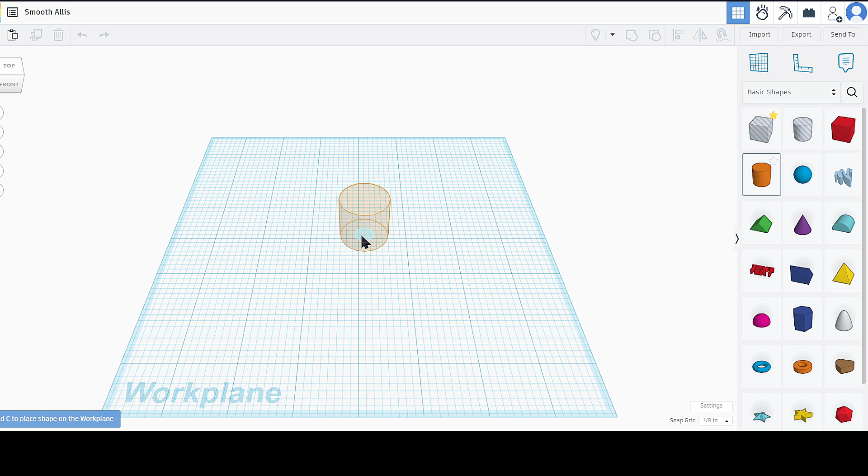So I'm thinking we're going to start with a cylinder here. Now I did a measurement of the stick and it's a 1-inch dowel in diameter, and this is exactly 1 inch by 1 inch by 1 inch tall. So first we're going to make this 3 inches tall, and then I want to bring this out. I'm going to press and hold shift, and we're going to make it 1.5 inches. Is that 1.5 inches? Yes, 1.5 inches. Put that back in the center. Click up here to check the top view. It's not going to let me center it, so we'll come down here and change this to 1/16 of an inch. Centered. Beauty, plan.

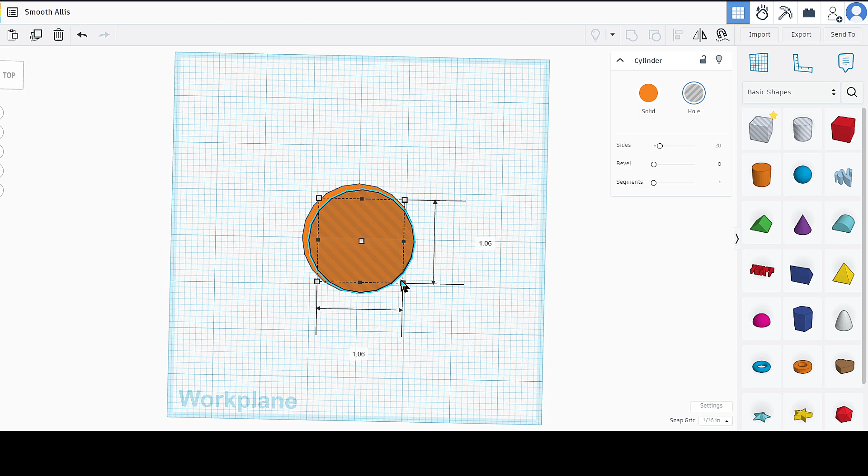Now, seeing how this is a 1-inch dowel, we're going to go just a little bit wider than that. We're going to grab one of these transparent boxes, stab that right on top. I want to bring this out just a little bit, go 1/64 of an inch. You know what, we might be fine there. So we're 1 inch, this is a 3-inch tube. We're going to bring this up to 1.45. Then I want to grab up here and slam it down into the tube.

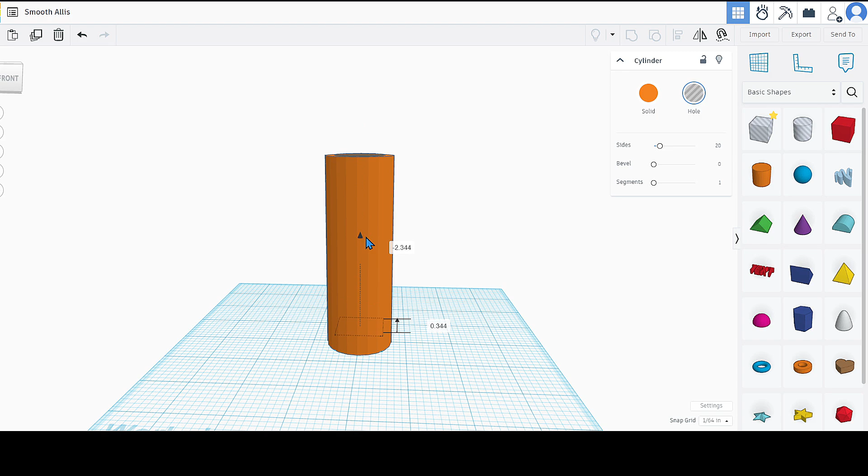Before I do that, we're going to copy it and paste it back to the top, drag this so it overlaps, slam it down so it's just protruding out the bottom a little bit. Grab all that, combine it, and what we end up with is a 1-inch hole with a plate in the back.

The dowel hopefully slides in there no problem. Maybe I should make it a little wider. Go 1.1, that looks good enough for me. That one's off kiltered anyway. Then we'll grab it all, re-put the hole in it, and we should be golden.

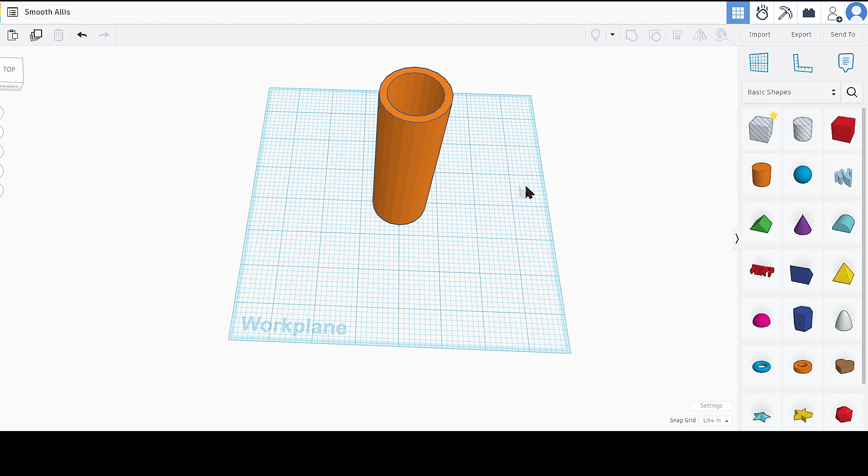Now, like I said, we can use glue, or we can grab one of these, shrink it down, extend it up, rotate it sideways. I'm not the best in CAD, as you can tell, but it's still fun designing your own projects, right? Copy that, bring it up a tad, and we'll shove it right through.

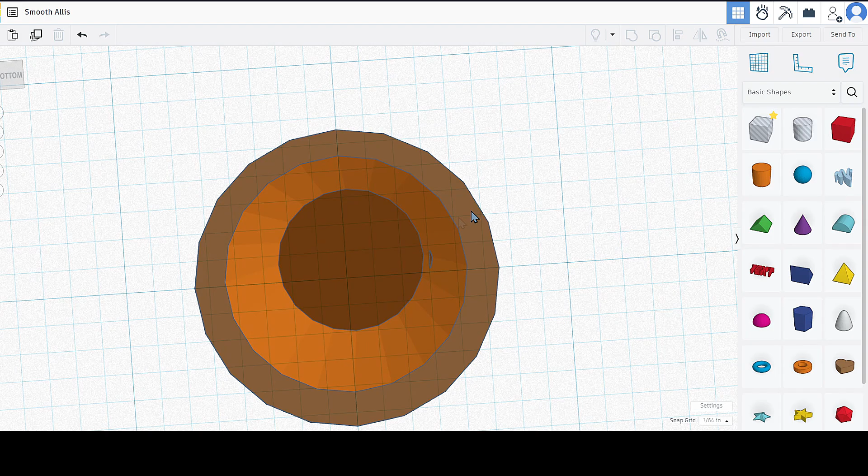Join it all together, so now we have 2 screw holes. Screw the dowel in, lock them in place. You can see the hole protrudes through there, and if I can get underneath it, you can see the hole protrudes through there. Right there. So, in theory, this should work to attach the dowels together.

Next step, send it to the 3D printer and see if we can make this work.

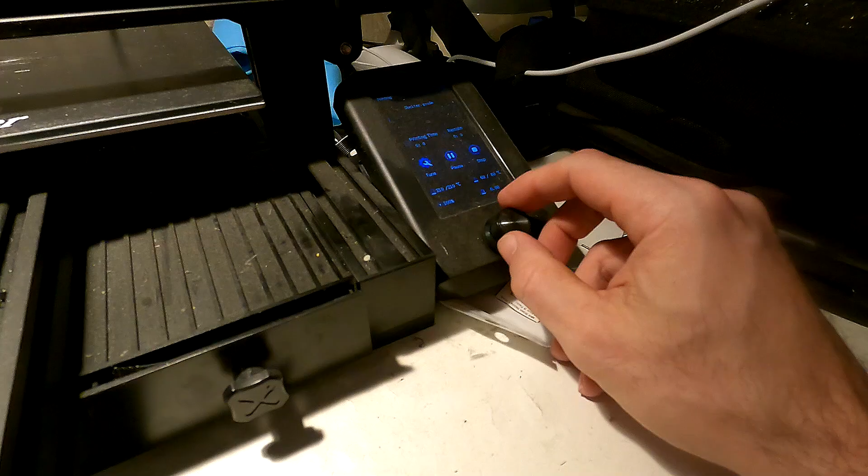There we go, it's an absolute mess over here, but we got the 3D printer set up. I don't know why it's not pulling the G code. I set it to run at 50% speed. Oh, is it pooping? It's pooping, that's a good sign. I moved the spool over to this side because I was having an issue with it on top where it kept breaking off filament, so I figure if I have it on the side of the machine, it'll be a little better.

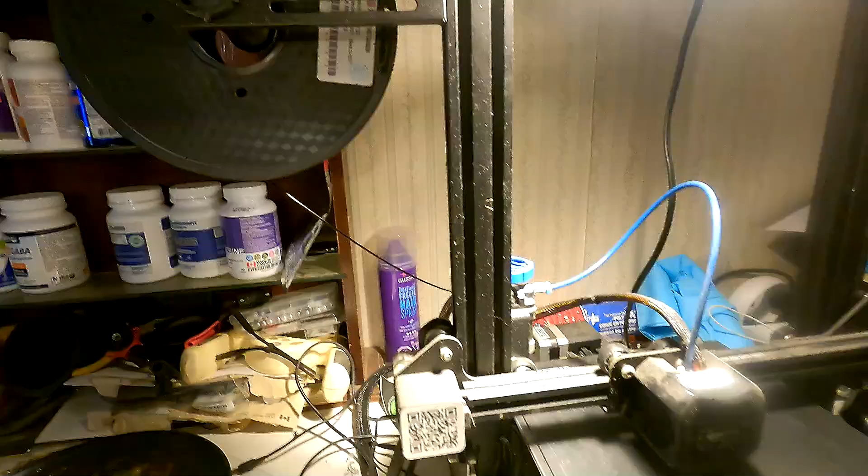I also laid down a trace of hairspray, which is a real good way to make sure your prints adhere to the bed, and we're going to print a skirt so that it'll actually hold. Now, this said it's going to take about 6 hours to do, which means it won't be done tonight. And I'm pretty sure I left the zipper up on the shelter, so I'm going to have to go outside and get that dealt with.

Alright guys, the next day, this thing finally printed. Yippers, finally printed. Really wish I still had my GoPro mount for the 3D printer, would have made things look a little better, but I don't, so whatever.

Anyhow, like always when I 3D print things, I didn't measure it right. I really need to buy one of those digital calipers, you know, the ones you use to measure holes and stuff, because that would make life a lot easier. Anyway, this is too big for that pipe because it turns out that pipe isn't an inch, it's actually 3/4 of an inch.

Whoops. So I did some thinking and I'm like, wait, this is a 1-inch hole. I had that tomahawk project I 3D printed for class so I could have a tomahawk in class for martial arts. I still had some 1-inch dowel left, which is right here, and it fits in perfectly, a little bit loose. However, that's why I put the screw holes in there.

So I can fill this with a little bit of epoxy resin in the bottom, stick it in, let it dry, harden, jam a screw through it, do the same on the other side.

Now this is just a small piece, mind you, like I won't be using this because this came off of stock that I used for making tomahawks for class, for the trainers who are not financially okay, you know, they're students, currently big time in debt, so going on Amazon and buying a $50 tomahawk trainer wasn't in the budget. So giving them something like this with a hawk head on the end where they can practice the maneuvers and disarms, it's good enough.